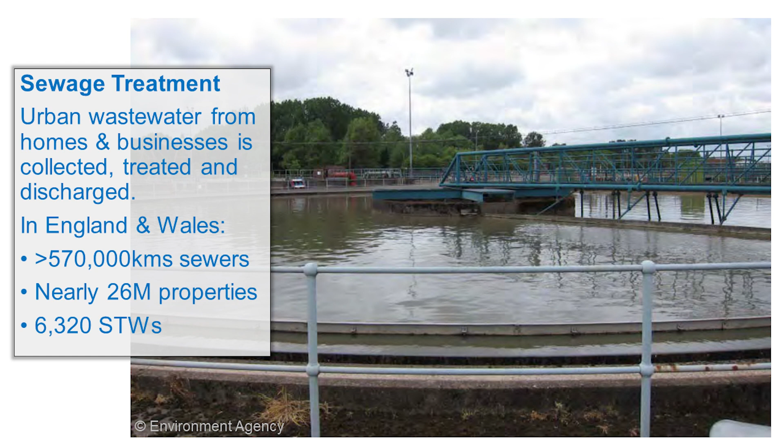This is a huge operation. Across England and Wales, we have over 500,000 kilometres of sewers that collect our urban wastewater. These systems serve nearly 26 million properties across the country, and we have over 6,000 sewage treatment works, or wastewater treatment works, or wastewater recycling plants, however you like to refer to them. So a huge operation to manage and process our wastewater.

In terms of what this looks like, there are a couple of key stages our sewage treatment process goes through. Once the water has been collected from our homes and businesses and ends up at our wastewater treatment works, the first process is screening, where large items that really shouldn't be in the wastewater are screened out so the rest of the treatment process can be more efficient. This includes big things you might expect to find in our wastewater, like nappies and wet wipes, and even sometimes quite obscure things like bricks.

The kinds of things we get in our wastewater system are the things people might flush down their toilets, but there are also things that can find their way into the sewage system through things like street drains. So there can be a lot of large contaminants in our wastewater, and the first step is to screen those out. Once that has happened, the primary treatment, the first stage proper in the process, takes place.

This employs big settlement tanks where the solid parts of our wastewater sink to the bottom of the treatment tanks, and they're termed sludge. The liquids, the bit that's left over, are sent on to the next stage for further treatment. In this secondary treatment, the tanks are aerated, putting oxygen into the wastewater to help what we'll call the good bacteria break down other harmful pathogens. These primary and secondary treatments are common across all of our sewage treatment works.

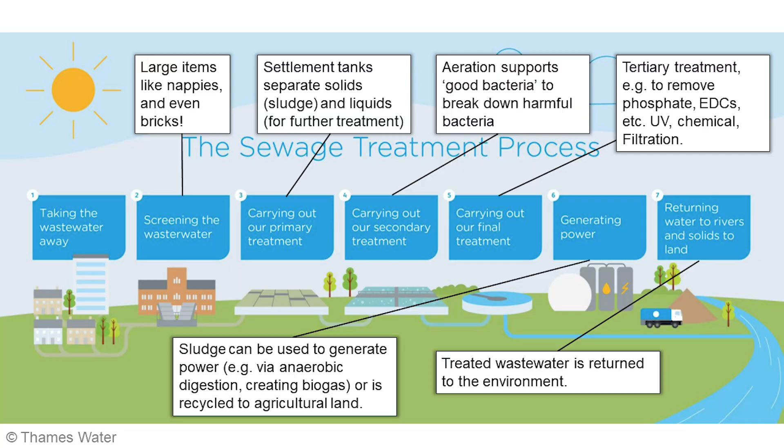We have these overflows on our sewerage systems to provide a bit of a safety valve. The reason they're necessary is that in large parts of the country, our sewage systems not only take the domestic water from our sinks, toilets, baths, and showers, they also take water from the outside environment, so street drainage or rainwater which falls on our roofs and is discharged into the sewer system through our downpipes. Under dry conditions, we're not really getting any of that additional rainwater into the sewerage system.

And so some of that excess water is drained off into a storm tank. This is effectively a holding area that holds this excess water until there's capacity in the wastewater treatment works again, and then it will be pumped back through the works and discharged and treated as normal.

But the main problem occurs when we have very heavy rainfall, and that's really what these storm overflows are supposed to deal with. We'll have huge volumes of water coming in from particularly our urban landscapes where we have a lot of hard paved areas, so that water can't infiltrate into the ground. So all of the water from streets, car parks, and the roofs of our homes and buildings runs into the sewer system—huge volumes that can't be accommodated in the system.

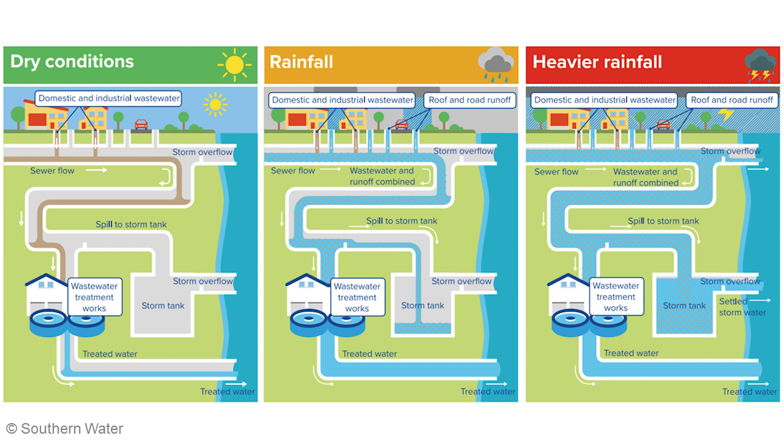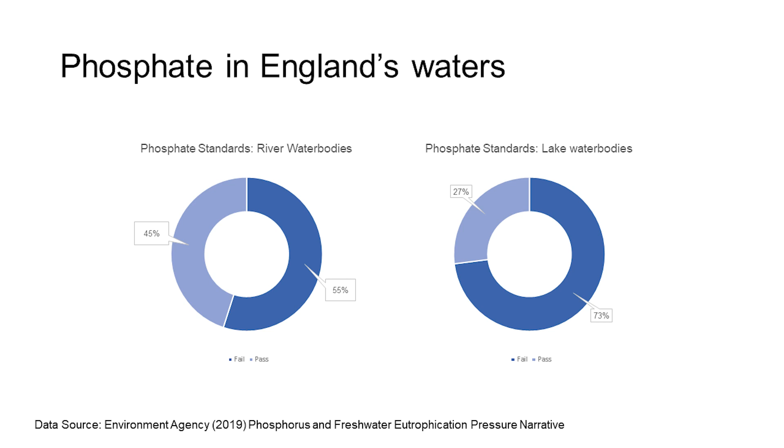If I showed you a similar graph from the previous batch of data from 2016, it would look almost entirely the same. So phosphate is something we really haven't managed to tackle in terms of pollution to our water bodies. Why is this a problem?

Phosphate is a plant nutrient, and at natural levels it feeds the aquatic plants found growing in our rivers. A certain amount of this nutrient is necessary for healthy growth, supporting plants like ranunculus, the water crowfoot, which provides a food source and an important physical habitat for the aquatic insects found in our rivers, including our chalk streams like the Test and the Itchen.

But when these phosphates are present at excessive levels, it can cause changes in the aquatic plant community. Nutrient-hungry algae, both free-floating in the water and filamentous, growing over and smothering other plants in the channel, start to outcompete the plants that are usually present in rivers. The algae smother the aquatic plants, blocking out the light and causing them to die.

And when the nutrients in the watercourse are used up, the algae then die back too. The bacteria that break down all of this dead plant material, this organic matter, use up oxygen in the water, causing oxygen levels to drop.

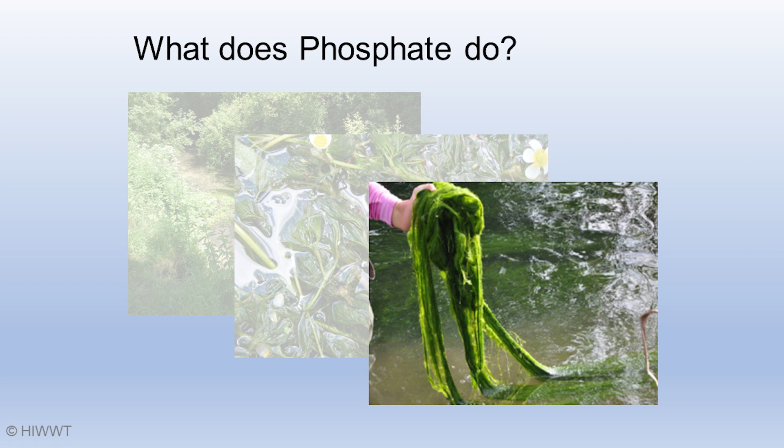The material itself is deposited on the riverbed as fine sediment. This is a particular problem on gravel-bottomed channels, as it chokes the aquatic insects, the aquatic invertebrates that live amongst the stones, and it suffocates the eggs of fish like salmon, which are laid in gravelly depressions in the riverbed. In extreme cases, the low oxygen levels can cause substantial fish kills.

So phosphate pollution can affect the entire aquatic community of our river system. It can also prevent us from using and enjoying our rivers, our lakes, our coastal waters, because algal blooms and their impacts threaten things like angling and shell fisheries, and they contribute to flood risk. So phosphate is a big problem across our watercourses.

Where does this phosphate come from? Well, it comes from a number of sources, which can make it quite tricky to tackle, and that's one of the reasons we haven't made substantial progress in bringing those phosphate pollution figures down. But understanding where these different inputs come from can help us understand and control levels in our waters.

Phosphate occurs naturally and is found in sedimentary rocks, those formed in lakes and seas by deposited sediments. It gets into those rocks because it's present in the bodies of animals, particularly in things like bones and teeth.

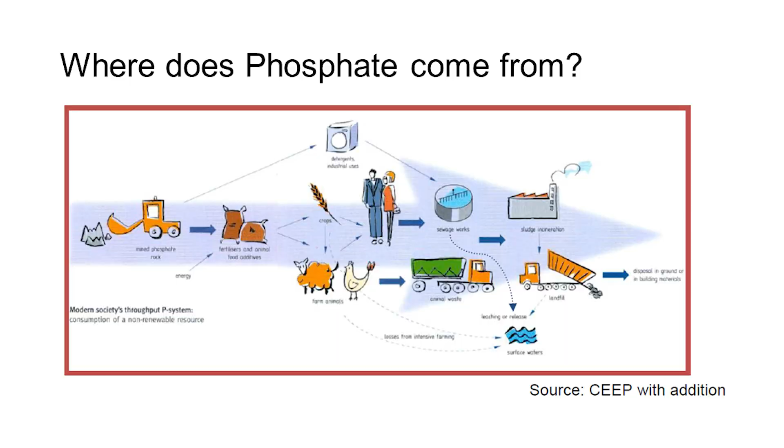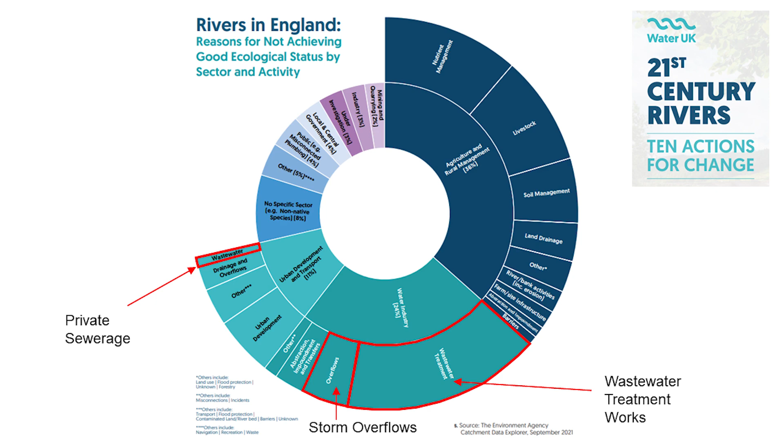So what do we mean by private sewerage? Well, anyone who doesn't have their wastewater taken away through the sewage system and dealt with by the water companies has some form of private sewerage system.

Historically, a lot of these would have been what we call cesspools or cesspits, and these are effectively just a big tank in the ground that all your wastewater goes into and then has to be taken away and disposed of by a company who come and empty your tank for you. But those are not very common anymore.

The majority of private sewage that we see today are either septic tanks or small package treatment plants or small sewage treatment plants. The difference between these is that septic tanks are chambers that are placed underground and which your wastewater from your home discharges into.

There are bacteria in these tanks which help to break down the waste. Very similar to the water industry process, the solids sink to the bottom, forming a sludge, and the liquid then flows out into a drainage field. And here, more bacteria in the ground will help to treat it and help to break down those components of the wastewater as it soaks away into the ground.

Because these systems don't have any form of active treatment, the end product, that effluent that comes out of the system, isn't as clean as it could be. And so these systems are not allowed to discharge directly into watercourses.

More modern private sewage is sewage treatment plants or small package treatment plants, as they're called. And these work in a very similar way, but in addition, they use powered mechanical parts to aerate the bacteria. So again, very similar to what we saw in the water industry sewage treatment works, where the treatment tanks are aerated to help more efficient treatment of the bacteria in the waste.

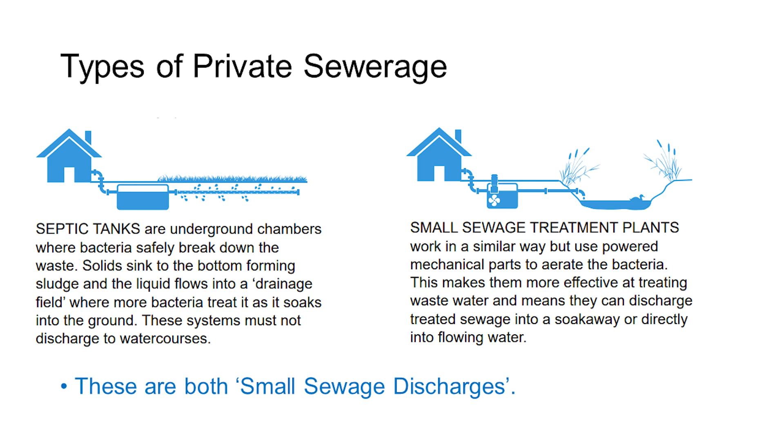So this makes the package treatment plants more effective at treating the wastewater. What comes out of them is cleaner than what would come out of a septic tank, and this means they are allowed to discharge directly into flowing water, although many of them will also discharge into a soakaway first.

A few years ago, Hampshire and Isle of Wight Wildlife Trust and its partners in the Test and Itchen Catchment Partnership undertook a bit of a mapping exercise to try and understand where private sewerage existed across the Test and Itchen catchment. This wasn't, unfortunately, a straightforward exercise because there is no national map of where private sewerage exists, but we were able to work it out.

The way that we did this was we obtained a digital mapping layer from the local water company, Southern Water, showing where their sewer systems are, so where they have sewer provision across the area. And then we obtained a data layer that's open source data, freely available on the internet, that showed where all the properties are across the country.

And if you take one away from the other, what you're left with is properties which are not served by main sewerage. And so the assumption is that all of these properties have some form of private sewerage instead.

The vast majority of the population tends to be concentrated in urban areas, and usually these will have pretty good public sewage provision. So it probably comes as a surprise to a lot of people who live in Southampton, like myself, or Eastleigh or Winchester, to see that there's actually quite an extent of private sewage across the country.

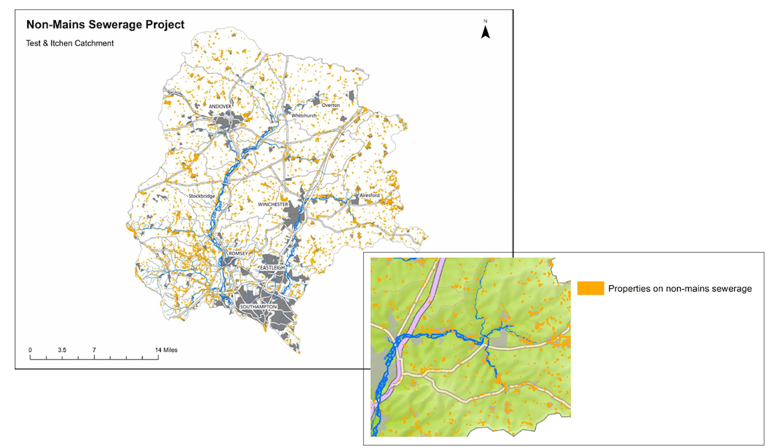If I zoom in on the detail a little more, you can see that in some of the areas surrounding our watercourses, the Test and the Itchen, we have a lot of properties that have this private sewerage, and so there is a concern that the effluent that's coming out of these private sewage systems could be having an impact on the ecology of our chalk streams.

Natural England, the government's conservation advisors, undertook a bit of research because of this concern. They looked at the impacts that private sewerage could potentially be having on designated sites.

So if you think back to the donut diagram from Water UK, we saw that the segment that private sewerage was responsible for was really quite small. So we know that they're not having a massive impact upon our watercourses at that national level.

But we don't know if they're having an impact more locally, and particularly if they're having an impact on sites which are designated for their nature conservation interest. Often these might have much more stringent water quality requirements because of the important species that are found there.

There is a risk that private sewage could be having an impact on the ecology of chalk streams like the Test and the Itchen. So Natural England looked at the impact of phosphorus inputs from small sewage discharges on designated freshwater sites. They did this by firstly undertaking a literature review, looking at what had been published already, and also commissioning 2 case studies looking at particular designated sites that had a high level of private sewerage in their catchments.

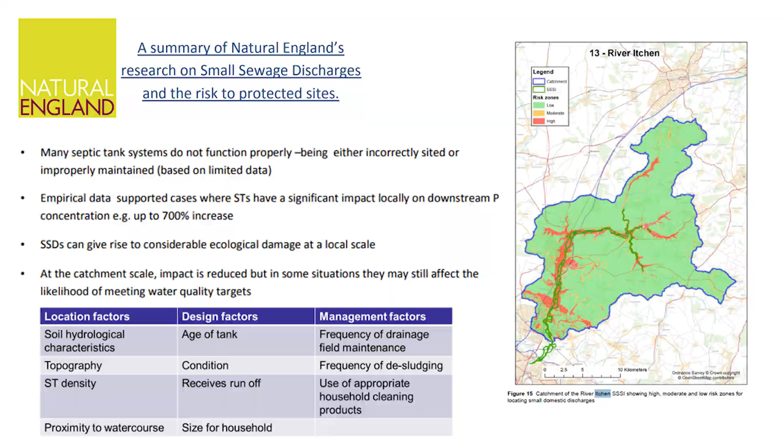Because of these concerns about the known impacts of private sewage on our watercourses at that larger national level, and also concerns about those more local impacts on designated sites, the government decided to take action to tackle the pollution that can come from these private sewage systems. They introduced what are known as general binding rules. These are basically a set of rules that you as a septic tank owner and operator need to comply with, and if you can't comply with those rules, you'll need to take action.

These are not the rules in full detail - it's quite a lengthy piece of guidance to read through and understand. So I'll pick out a few of the headlines here and then talk about them in a little more detail. What the rules meant overall was that if you had an existing discharge, so a septic tank or package treatment plant in place before 2015, you had to meet a certain number of requirements.

These included that you can only discharge a relatively small volume of water - 5 cubic meters if discharging to a watercourse, or 2 or 3 cubic meters if discharging directly into the ground. They can only serve domestic properties, not businesses. They must not cause pollution, and I'll come back to that in a little while. Where septic tanks are discharging to water - remember the diagrams at the beginning - septic tanks don't treat the waste to as high a standard, and so they're not allowed to discharge directly to watercourses.

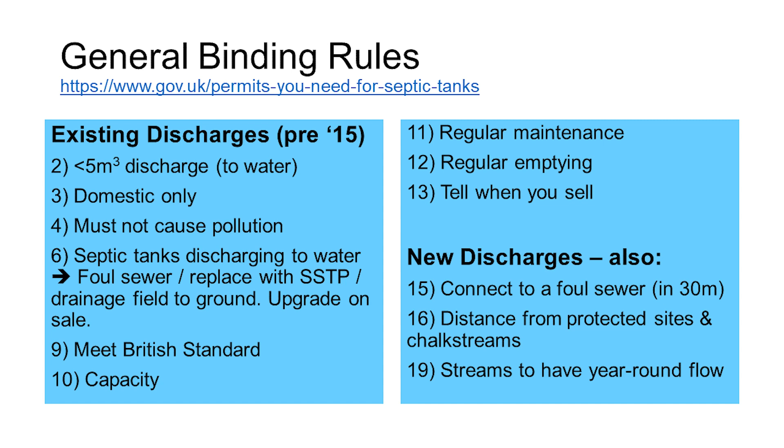There were also restrictions on how close you could be to certain designated nature conservation sites, and in particular to chalk streams—within a certain boundary, these private sewage systems would not be allowed. There's also a requirement that the stream a package treatment plant discharges into should have year-round flow, so you wouldn't be allowed to discharge into something like a winterbourne, which only flows during part of the year.

One question often asked is, if I have one of these non-compliant systems, when do I need to upgrade? I've seen websites suggesting particular dates by which an upgrade should be undertaken, otherwise you'd be breaking the law. But from looking at the general binding rules, I can't see any specific dates set out myself, even though there are lots of articles out there saying by 2020 or 2022 or various other dates.

On the government website hosting the general binding rules, if you scroll to the very bottom of the page, there's a section saying updates, which gives information about changes made to the page over time. I had a quick look, and it shows that in 2018 the page was edited to say that properties with septic tanks discharging directly to surface water—which isn't allowed—sold before 2020, responsibility for replacement or upgrade should be addressed between buyer and seller. This suggests that after 2020, that would automatically have happened—those systems would already have been required to upgrade, so there'd be no need for that conversation when selling a house.

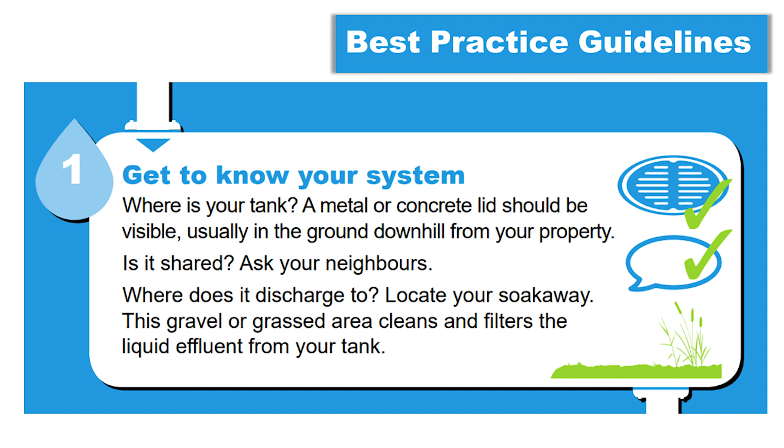So locate your soakaway. This will normally be visible as a gravelly or grassed area. It's important to know where this is because it plays an important role in helping to clean up the effluent from your tank.

Next, check your system. If it's working properly, your soakaway shouldn't be waterlogged. There shouldn't be pools of water running off into nearby ditches or watercourses. If you look inside your tank, the effluent should be relatively pale or even clear, and it shouldn't really be too smelly. If you are having any of these signs, it's an indication that something isn't working well within your tank.

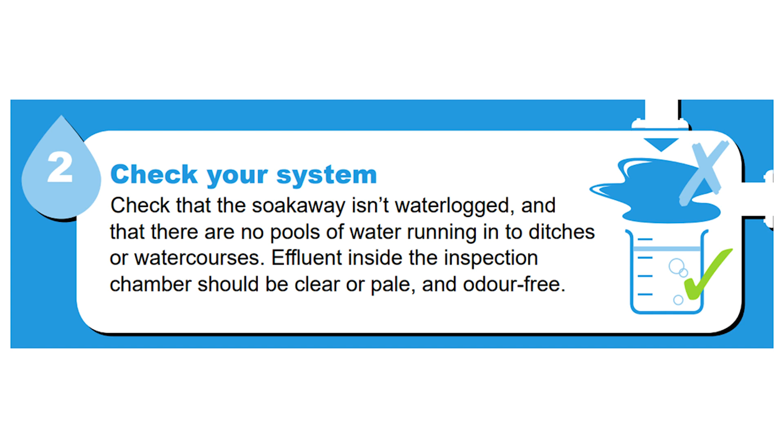Next is finding out whether your tank is compliant with these general binding rules - looking at how much water your tank is discharging, 2,000 litres or 2 cubic metres if discharging into the ground, or 5 into a watercourse. The reason these are called general binding rules is that they are a standard set of rules that everyone can comply with. If you are satisfied that you can comply with these rules, then you don't really need to do anything else.

However, if you can't comply with any of those rules, you either need to think about rectifying that, making changes to your system, or applying for a permit. Systems that aren't compliant and can't be made compliant will need to make sure they have a permit in place. The permitting system and general binding rules are designed to protect the environment from the impacts of this sewage, so it's likely there will be conditions placed upon any permit to make sure your system isn't polluting the water environment.

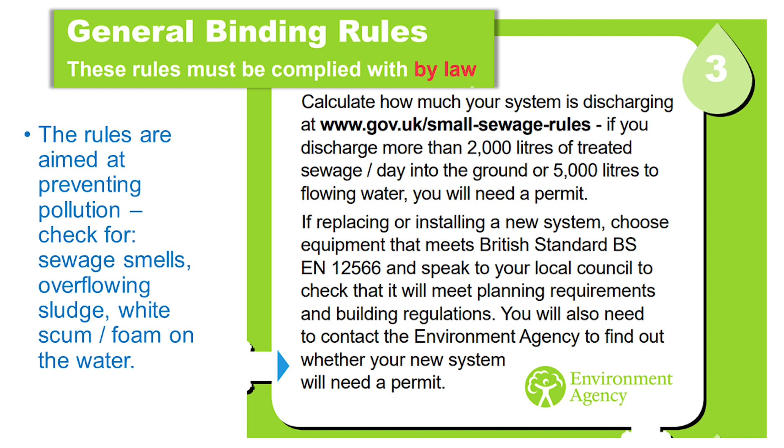The general aim of the rules is around preventing pollution, and the general binding webpage sets out details on how you can do this, and some of the signs you should be looking for - sewage smells, whether your system is overflowing, particularly with sludge, and whether you're seeing things like white scum or foam on the water, which is an indication that the effluent coming out isn't as clean as it should be.

Next on the list of top tips is to fix any faults with your system. It's worth saying that anything shown here on a green outline is part of the general binding rules, so these are your legal requirements. The things on a blue background are best practice tips, which will help you keep your system in good condition.

It is a requirement to fix any faults with your tank - things like gurgling pipes making a noise, perhaps because they're partially blocked, discoloured effluent, odours coming from your tank, a swampy soakaway, or even just lush grass, which shows there's a lot of water and nutrients going through the area. And sewage fungus, which will grow in waterways if there is sewage pollution - it looks very much like grey cotton wool in the watercourse. These are all signs that there's a problem with your system.

One of the most common problems is that tanks are not functioning well because they're too full and need to be emptied. Another big problem is that the pipes feeding your tank might be blocked, and you can clear these with boiling water or drain rods.

If you've got any more substantial problems, it's important to get them fixed as soon as you can. This helps prevent ongoing pollution. If you've got sewage coming out of your tank, that can be a health risk. And the longer you leave it, there could be escalating repair bills.

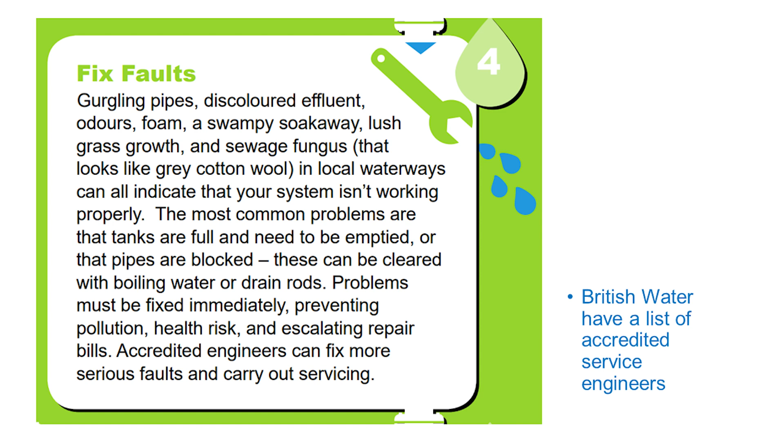The general binding rules recommend that you use an accredited engineer, and British Water have a list of these accredited service engineers on their website.

Next, in terms of requirements, is to empty your tank. This is one of those legal requirements. Private sewage systems need to be emptied of sludge, and the frequency will depend on how big your family is, how much water you're putting through your system, as well as how well you've maintained it. But the general guide seems to be that roughly annually should be about right for an average family.

It's important to make sure that the company emptying your tank is a registered waste carrier, because if they're not, you're ultimately responsible for whatever they do with your waste. So if they don't dispose of it properly and it causes pollution, that could ultimately come back to you as a householder. To make sure that they are, you can ask to see their certificate, or you can look up a list of registered waste carriers on government websites.

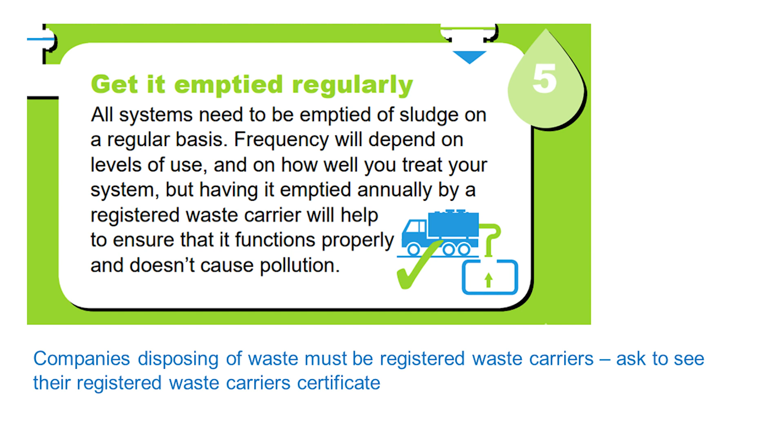It's also important to think about what else you're putting into your septic tank or package treatment plant. Obviously, the water and your toilet waste will be going into your tank, but also any cleaning products that you're using in your home, in your sinks, your toilets, your baths, will ultimately be going into your tank as well. If products aren't explicitly designed for these systems, they can be quite damaging to the bacteria.

So you will see on cleaning products somewhere on the label, it might say suitable for septic tanks. These are products which are specifically designed to not harm the healthy bacteria in your tank, which are important for keeping your tank environment healthy. It's important to remember that those bacteria help to break down and treat the waste material. So anything you're doing that's upsetting those bacteria could cause you problems with pollution.

If you can't find a version that specifically says suitable for septic tanks, it's worth going for something that just says environmentally friendly, because often they will also not have those harsh chemicals in them. So try and avoid things like bleaches, disinfectants, antibacterials. And also don't use these products in large quantities, because even if they're not too harmful, if you use a lot of them in your system, again, it can upset the bacteria.

Just like the water industry treatment process, they have the primary and secondary treatment processes. You might remember they have that tertiary treatment in some locations, which can do things like remove phosphates. Well, private sewage systems don't have that ability. So some of the phosphate will settle out in the sludge, but everything else remains in the effluent and is discharged out into the environment.

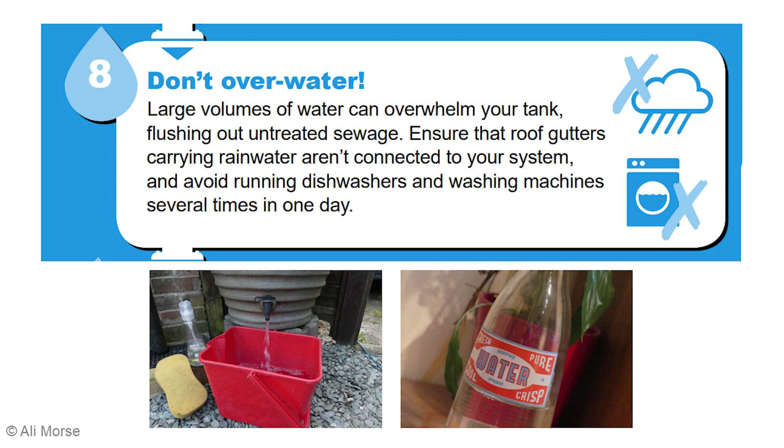Another good tip is to keep a record of what's happening with your system. Keep a note of any maintenance, how frequently you've had it emptied, and any servicing you've had undertaken. This is quite useful if you encounter any problems, because you've got a record of what's happened before, which might help contractors identify and fix the problems that arise, and it's also really useful if and when you come to sell your home, because that's something a new purchaser would be interested in.

Now, I'm not saying you need to record every single day how your septic tank is feeling, but it can be useful to keep something like a tank diary, which just keeps all of this core information together so that you've got that record if needed.

And finally, on the list of 10 tips, it's important to remember the legal requirement to inform a buyer in writing that your property has a septic tank or small sewage treatment plant if you're selling it. Although the requirement is just to inform them, if you can also provide wider information about the system, that will help reassure them, particularly someone who hasn't lived with a private sewage system before, who might be quite nervous about what they're taking on.

How expensive is it going to be to maintain? Am I going to have any big problems with it? So if you can give them information about how you've had it maintained and how they should operate it, that will help reassure them that they're not taking on something which could be a liability.